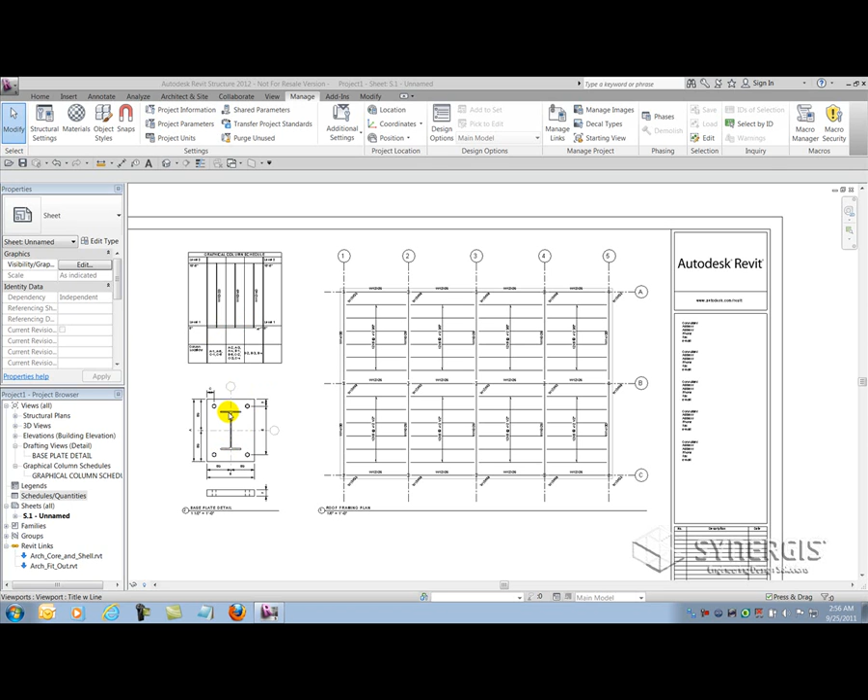So to refer to this information, what we can do is use alternative methods to somehow embed that information into our graphical column schedule. You'll notice here I have a sheet that has a plan, a drafted 2D detail, and the graphical column schedule. In the 2D detail of a base plate here, you'll notice that I have some key information called out, such as the spacing and the location of holes for the base plate bolts, the size of the plate, and other information.

What I'm going to do is create a schedule to kind of explain what all these parameters will refer to, as listed here, A, B, C, D, E, F, and so on. So I'll select a category that has nothing to do with structural engineering, such as air terminals, and then I'll create a new title for my schedule. Instead of creating a schedule of components, I'll create what is called a schedule key. This will create a project parameter inside of my project that will be used for the key information to be specified here. I'll give my key a name and I'll select OK.

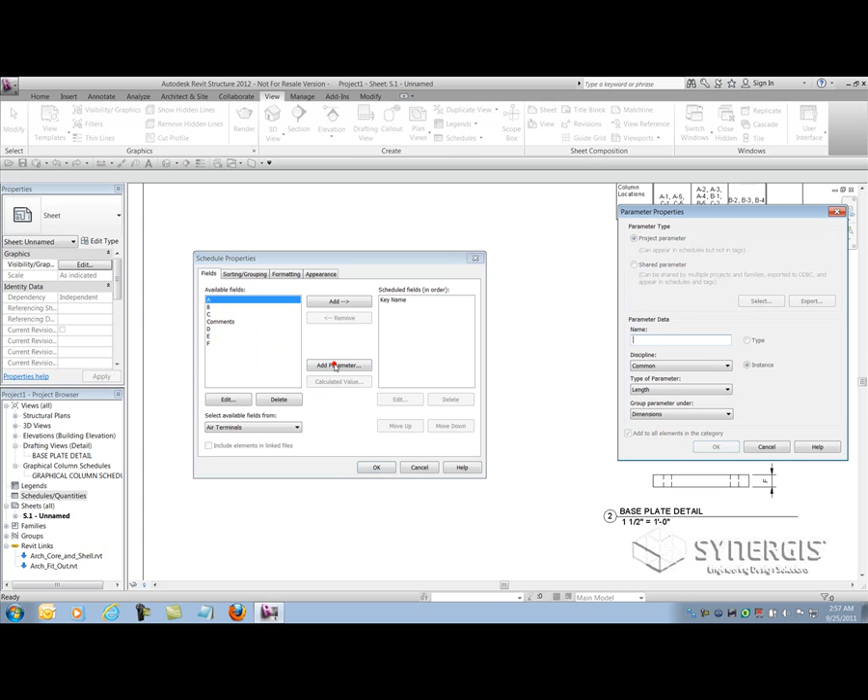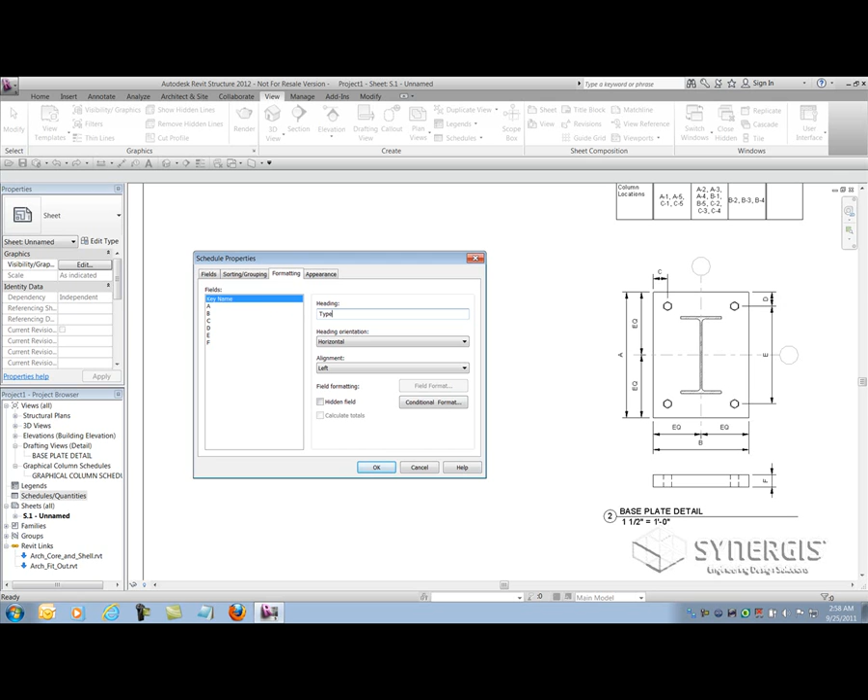Now to speed up the process, I've already created some additional project parameters within my file. You can use the Add Parameter button here to add these into your project. I simply gave it a name, specified its discipline and type of parameter, and its group. Now I can add these new project parameters I've created by clicking the Add button after I select them. I'll select the Sorting and Grouping tab to sort by key name, which is basically set to by default, and then I can come into the Formatting tab and specify some overrides if necessary, such as the justification of my information.

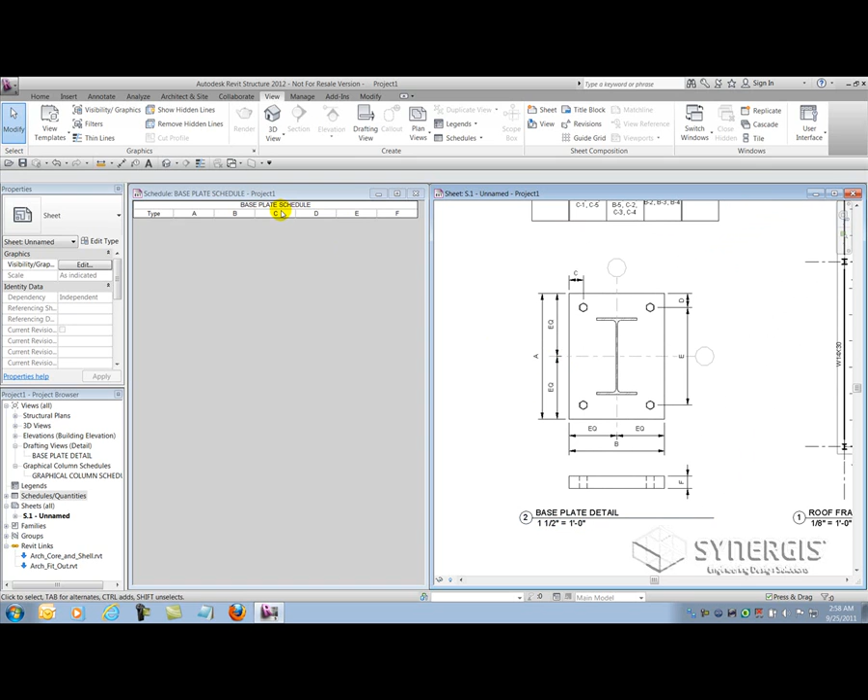Now that I have my schedule built, I need to populate it with information. So I'll simply tile my view side by side and start populating my schedule. Again, this is not a schedule that pulls data, but actually is a reference for data because it is a schedule key. So to add new rows of information, I'll select the New Rows button. I'll give the base plate a name or ID number, and then I'll start filling out the specific information here. So the value for A is equal to this, the value for B is equal to that, and so on. I can do this as many times as necessary, or for as many base plates as I need to call out inside of my project file.

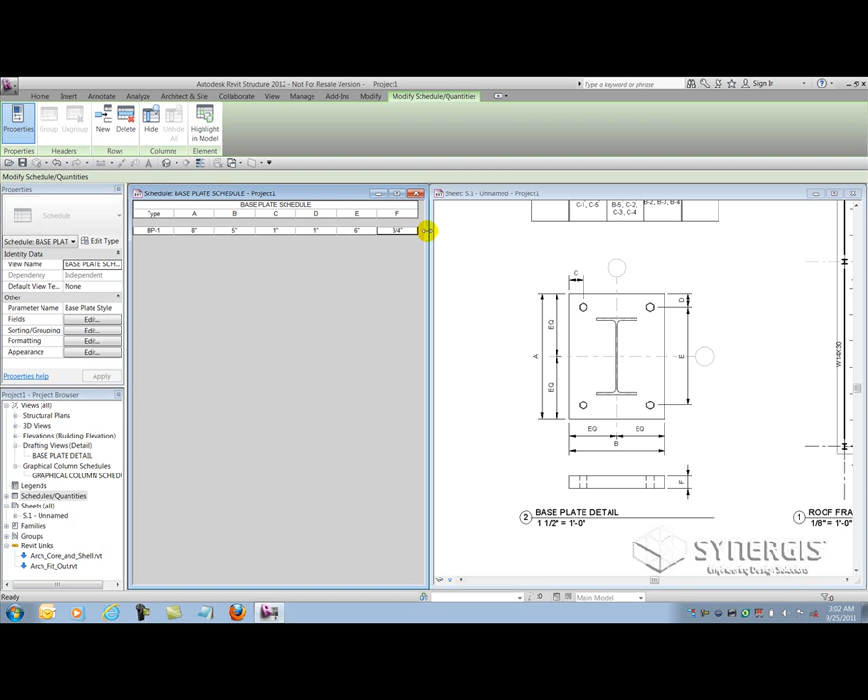So the next part of the puzzle is how to tag the information in my graphical column schedule. Because I cannot show the physical base plate in here other than a graphical symbol, I need to use a tag. You can see I have some tags on my columns already. These are structural column tags. Well, what I'm going to do is create another structural column tag which will allow me to specify the base plate information.

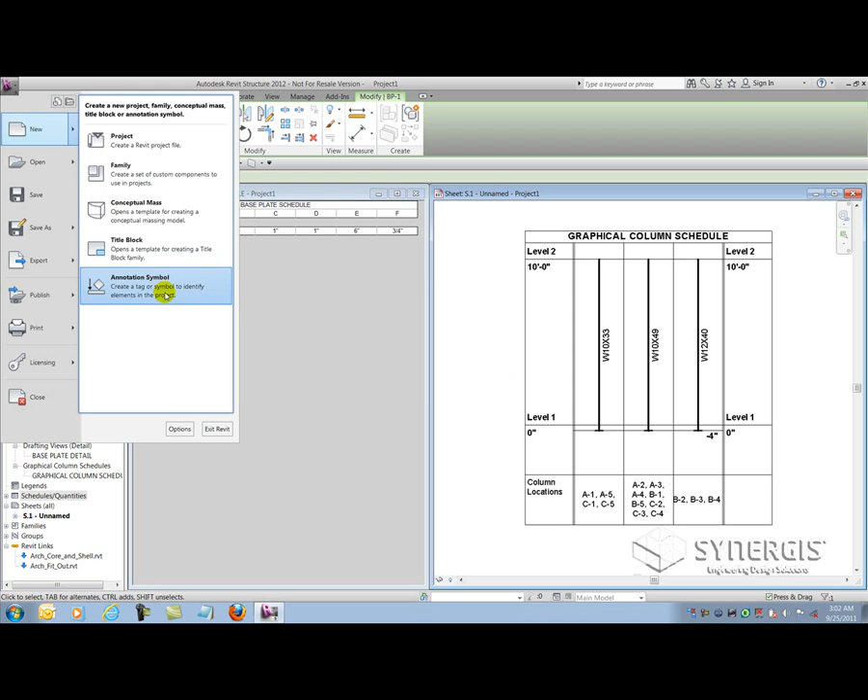I'll go into my options for tags. I'll select the generic tag template. I'll get rid of the temporary text that's inside the file, and then I'll start to add the necessary labels via the Home tab here.

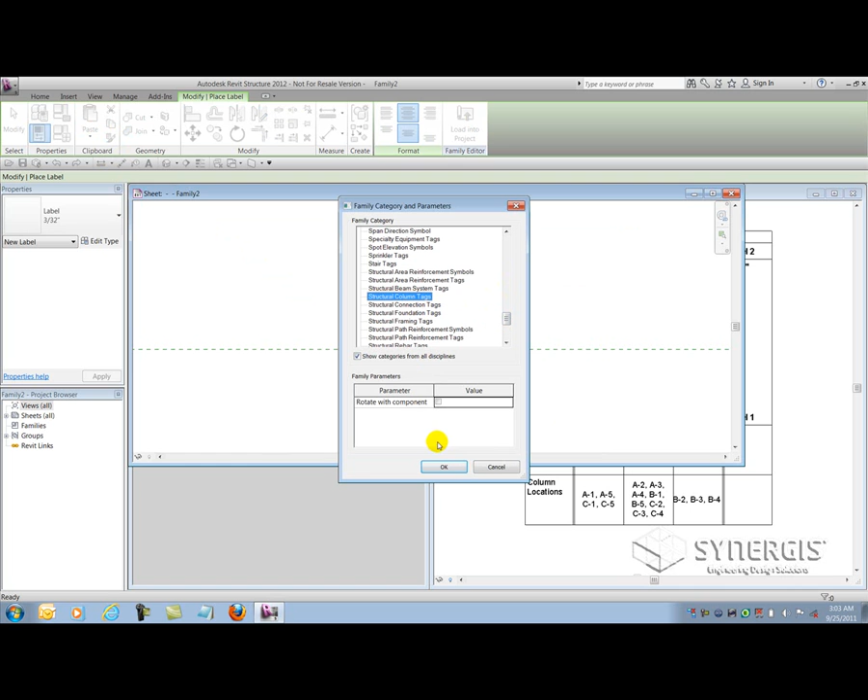Now unfortunately, what I have to do first before I can specify the information necessary to tag my columns, I have to go and set the category of my tag, done by selecting the Family, Category, and Parameters button on the Home tab. Once I've done that, I'll select the correct category, structural column tags, and select OK.

Now I can go place my label and you'll see the parameters of a structural column appear inside the list. However, the parameter that I need to specify is not available, so I'll create a shared parameter. To create a shared parameter for the first time, you simply select the Select button inside the dialog. It'll launch the Shared Parameters dialog, and if you do not have a shared parameter file specified, it'll ask you to create one.

If it's pointing to the wrong shared parameter file, you can basically browse to it by selecting Edit and then browsing to the location. Here in the Edit Shared Parameters file, you'll notice that there is a Browse and Create button. Once the shared parameter file is created, I need to create a group. This allows me to make multiple parameters and group them together logically.

Once I have the group created, I'll select the New Parameter button and I'll give my new parameter a name. I'll specify the discipline and the type of parameter necessary. In this case, it'll be text, and I'll select OK. And my shared parameter file is set up.

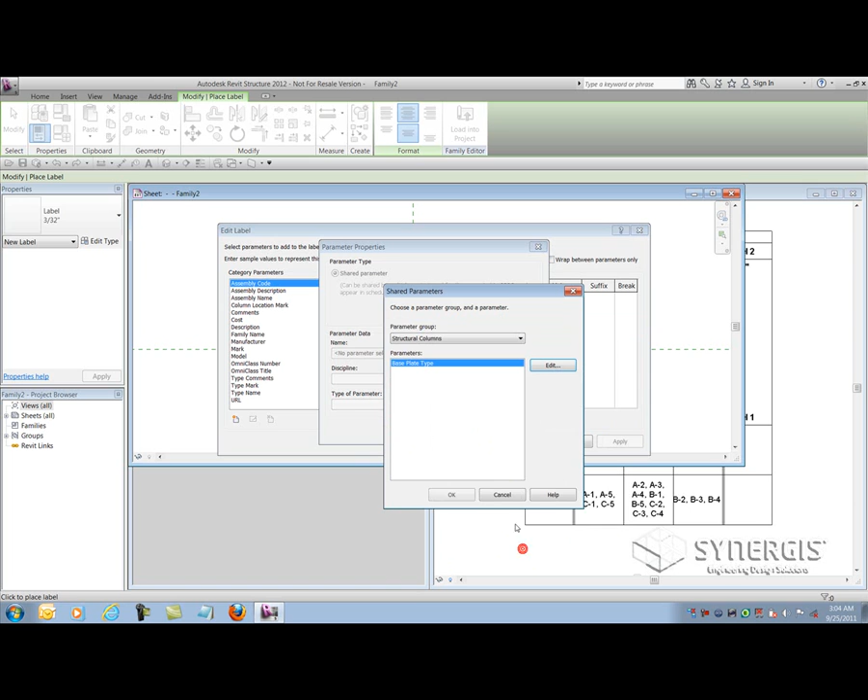Now I can pick the shared parameter that I just made. It'll fill out the information in the file, and now I can choose it from the fields on the left and add it to the label on the right. I can add some sample text as necessary, and then select OK. Now that my label's been specified, I can move it in position by just justifying with my nudge keys or my arrow keys on my keyboard.

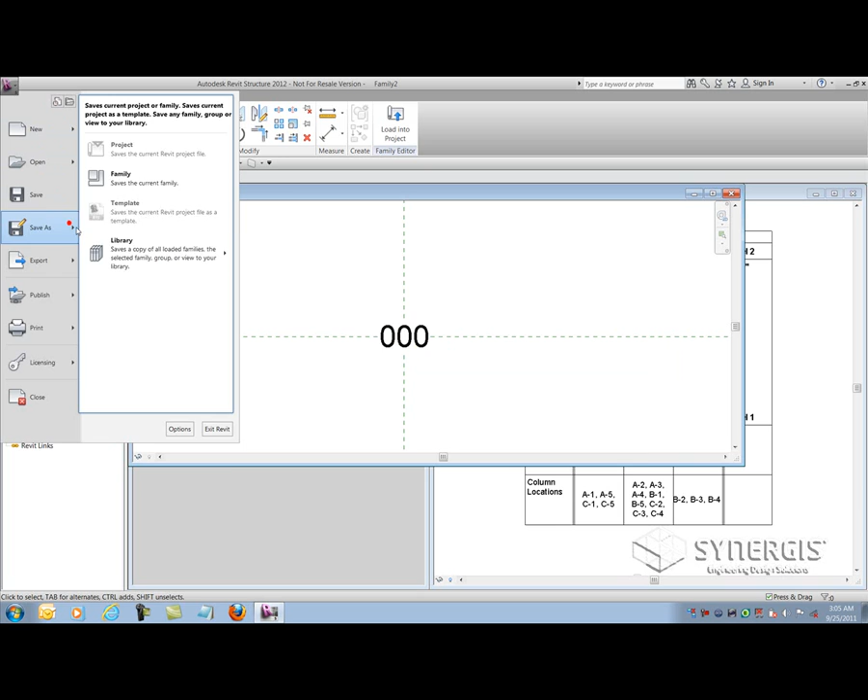And then I can go save my new family into my shared location on my network drive. After the family's been saved, I can load it into my project. I'll close the family, and then I'll go and tag my columns inside my graphical column schedule. Here you can see I activated the viewport in order to do this.

Now I've grouped my graphical column schedule with common columns, and as you can see here, when I scroll down, the columns that I've selected in column 1 here do not have the base plate parameter assigned to them. So what I need to do is share that parameter to the project as well. In order to do that, I'll go to the Manage tab and select Project Parameters. I'll select Add in the dialog, and then I'll browse to my shared parameter file.

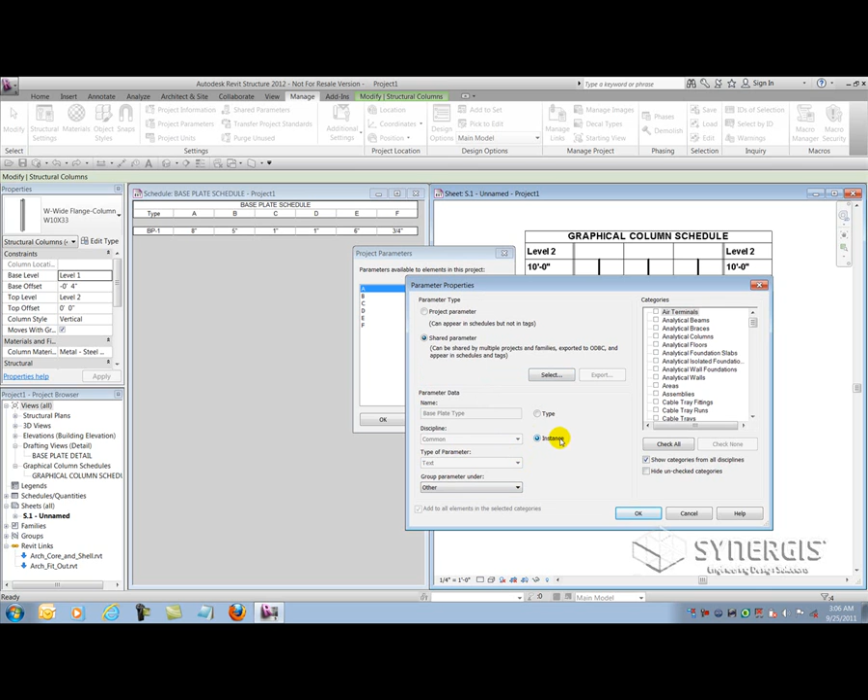I'll select my shared parameter I created previously for my tag, specify its group for locating it under the properties, set it to instance because I want each column to have a different base plate possibly, and then to the correct category, which in this case is structural columns. I'll select OK, and now if I select the column, I can see the base plate parameter appears. This is what my tag will read.

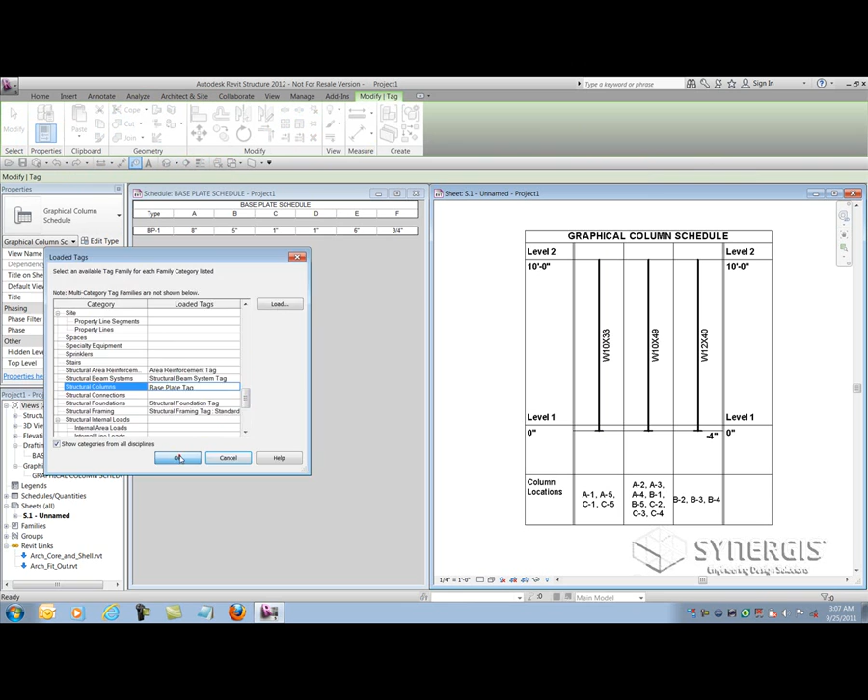So here I'm just going to simply input the value that is necessary, in this case BP-1. I'll hit apply, and now I should be able to tag it with my tag tool. So I'll return to the ribbon and select the Annotate tab, select Tag by Category, select the specific tag I want to use using the Tags button on the options bar, and then specify it for the correct category. I'll select OK, and then I'll go ahead and tag my columns in my graphical column schedule.

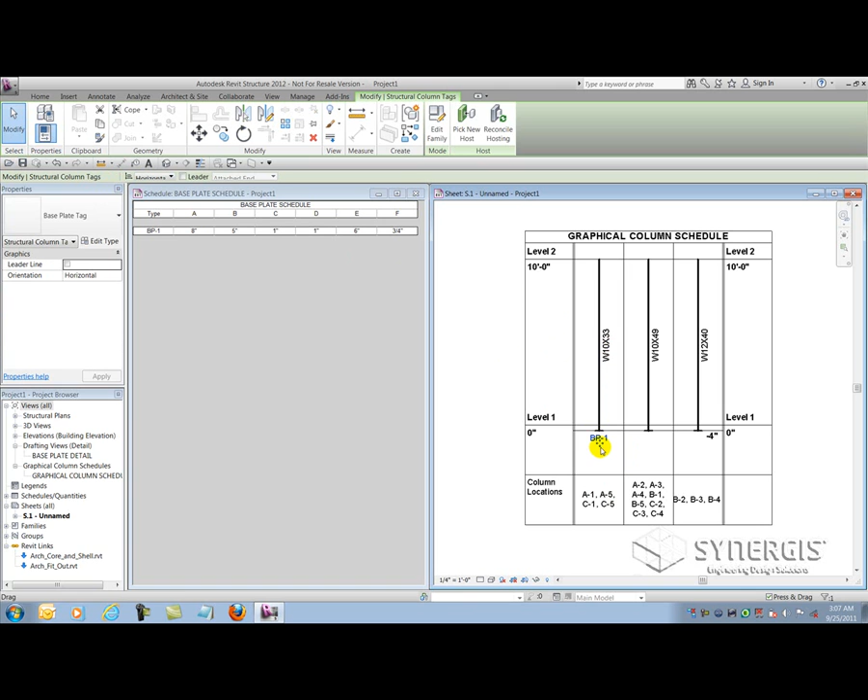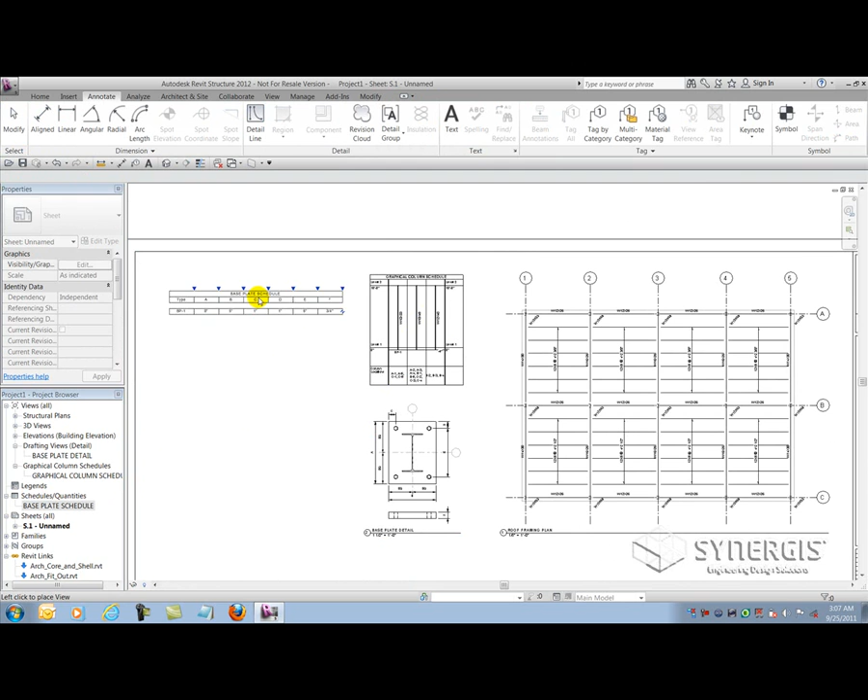Now all I need to do is move my tag into the correct position. I'll set its orientation correctly, and then I'll move it down into the spot where it looks best. And then once completed, I can go and deactivate the view. To tie it all together, I'll just drop the schedule onto the sheet.